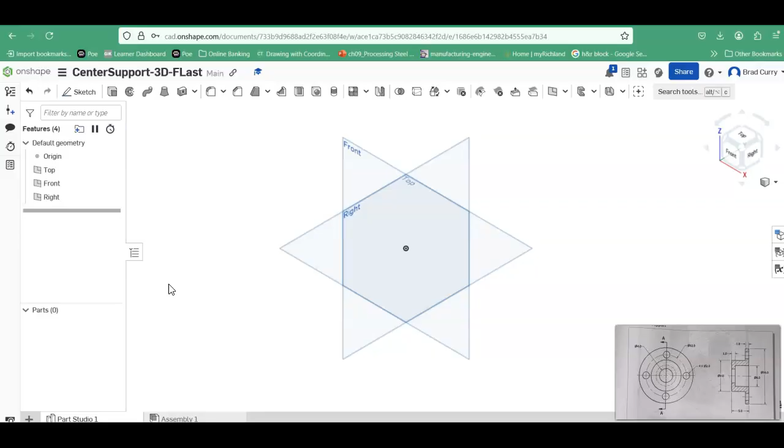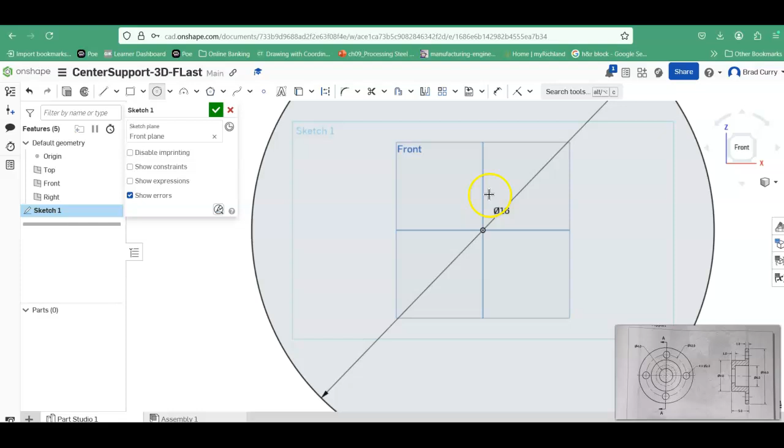The first way, if we sketch on the front view, we can basically sit here and say, all right, we've got a center point circle going off of our origin point here. We know that this is a 16-inch diameter going out here, let's select that. Then we also have the 9-inch diameter point as well. And we've got a center hole that goes through there that is a 4-inch diameter as well, so we'll place that at 4 inches.

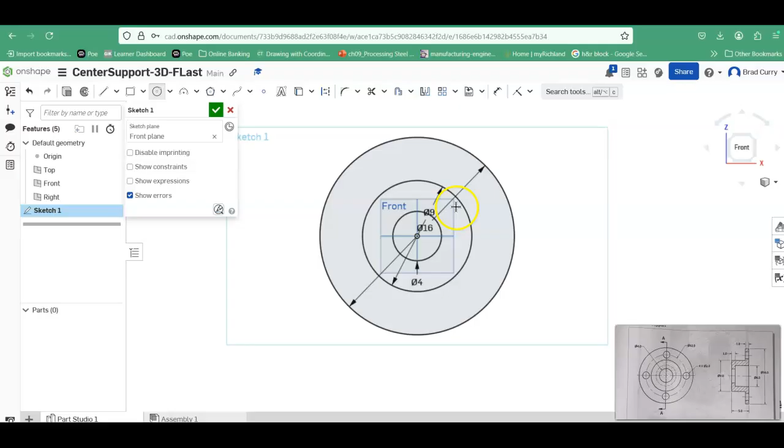Now we know that on the underside here, there's also another hole that's about 6 inches, but we're going to start this at the moment. We'll actually go ahead and draw that one in as well, right click, that one will be 6 inches there, and we've got the overall parts that we need.

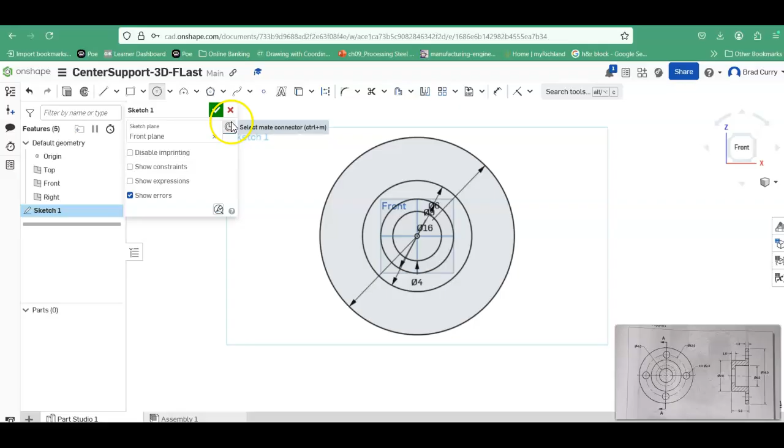All right, so let's go ahead and extrude this. Now I'm going to come back into my isometric here. You're going to have to think about which of these dimensions we know is going to be extruded. I'm going to extrude this going back into the part, and we also know that the inside portion here will also be extruded out.

All right, so let's go ahead, that is a dimension of 1, that's good, so we'll click there. Now, again, the sketch was consumed, so I'm going to poke this in the eyeball to get the sketch back. I'm having some issues seeing the differences between my planes, so we'll just shut those off right now so I don't get those confused.

As you know, now we're going to basically bring this surface, or predominantly this surface, out as well. If we do this one, it will close off, so we're going to hold off on that one for right now. So let's extrude this.

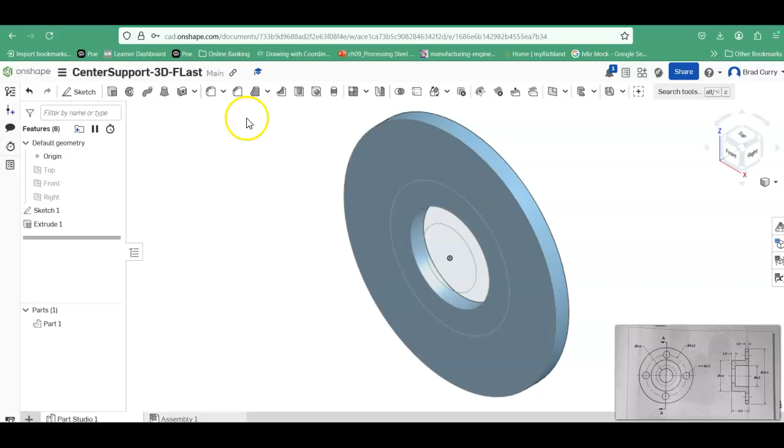And we want this to be extruded, and you kind of have to do a little bit of math. All right, we see that that's going to be extruded by 4 inches, so let's go ahead and change that to 4, coming out this way. And that looks pretty good.

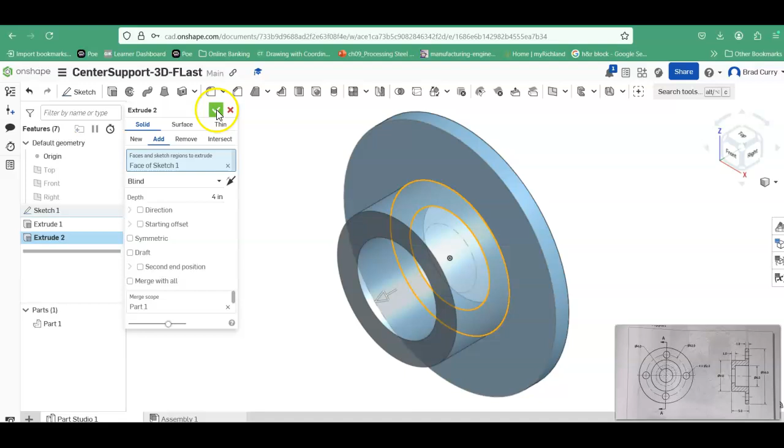So now we'll go back, and we have one more. We will need to create a sketch on this plane, and in this case the sketch we're basically going to be using is from here to there to kind of join these two together. So just go and create another circle from here, and that was the 4-inch dimension, so that places that into this.

Notice this is a construction line. We don't want that to be a construction line, so let's highlight that and uncheck construction.

So now at this point, we should be able to extrude that. So click back, hit extrude. In this case, let's go back to the isometric. The surface we're going to be adding will be here. Now notice it doesn't like this, because it wants to have another circle here on that sketch, and it's only seeing the one sketch.

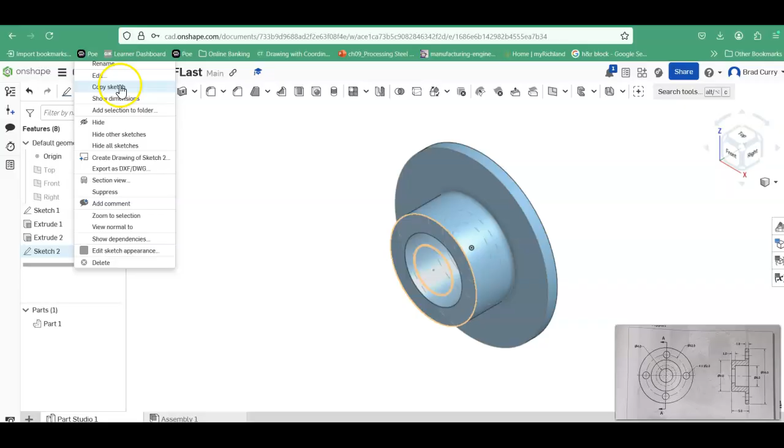So let's go back, edit this sketch. And of course we have to create another circle as well. Now in this case that's the 6-inch, so let's place this at 6 inches.

So now we should be able to extrude. We're going to extrude this back, and we see that that is 1 inch as well. So, and that is finished just by extruding these different diameters.

Let's go back here. We're going to have to create another sketch on this plane.

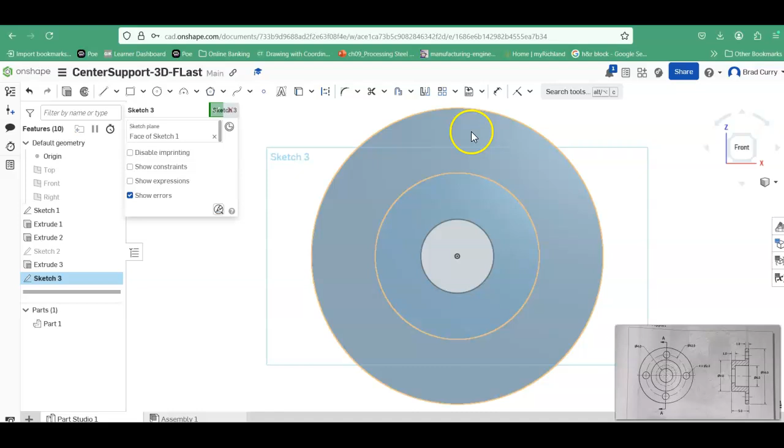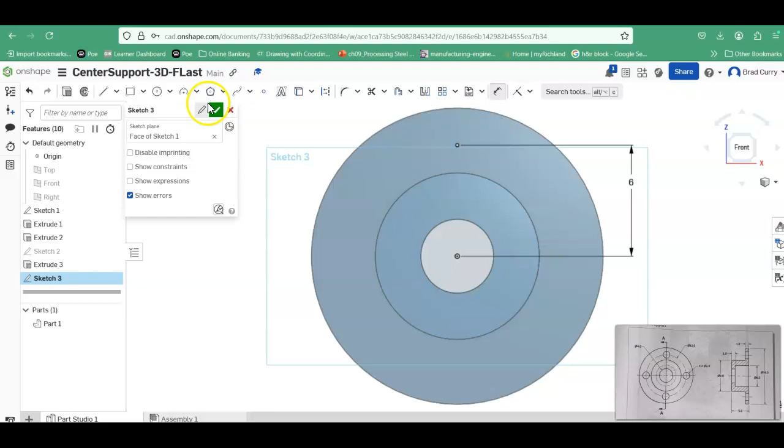So you could do it on the back plane as well, wouldn't necessarily matter. In this case, we're going to create a point right here at the top, and we're going to give that a dimensional constraint of 6, because it is on a 12-inch diameter bolt circle, so we're going to say that is at 6. I'm just going to have that as my sketch, because in this case I want to put a hole there.

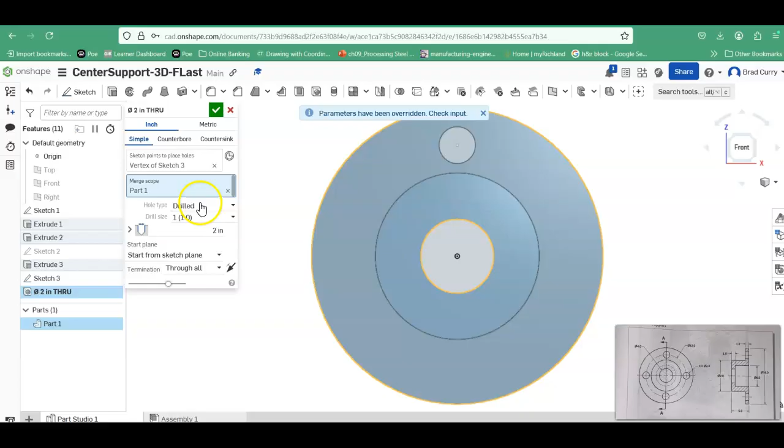So let's go ahead, we're going to put the hole right there. We'll take a look. This is just a standard simple hole, so it is a drilled hole that is 2 inches. So we'll go ahead and put a 2-inch drilled hole, and drill size will be a 2-inch drill size. Notice it does not like holes larger than what is given with the standard hole sizes, but we're going to keep that there. So it is going through all.

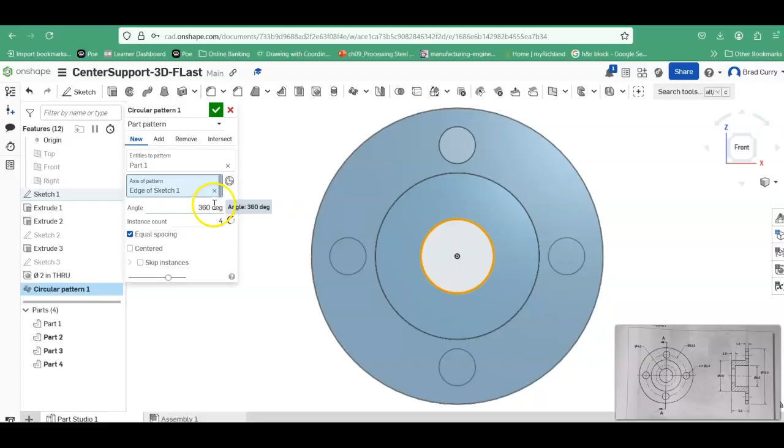So there's our actual hole, and now we can basically take and we're going to create a circular pattern. So we're going to put that hole, the axis of the pattern is right there, 360 degrees, 4 instances, equally spaced. And there is our hole pattern.

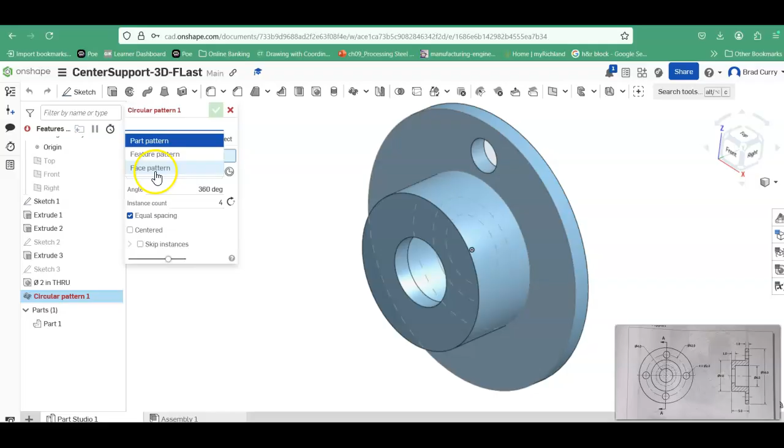Now, notice it did not give us and did not go through everything just like we wanted it to. So let's go back and take a second look. Let's go back to the circular pattern tool here and take a look. So what we are basically going to create a new pattern. Let's take a look at what we need: a part pattern, a feature pattern, or a face pattern. In this case, it's a feature pattern, and we want this hole to be the pattern, and next to the axis is right here.

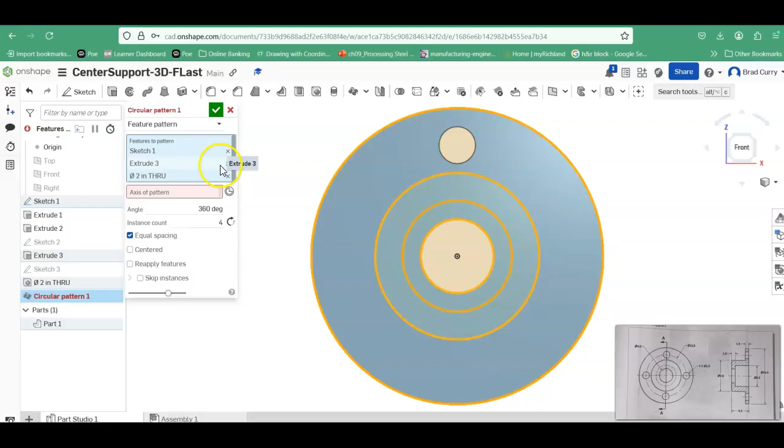So 360 degrees. The axis pattern is here. The feature to pattern is that hole. There you go. All done.

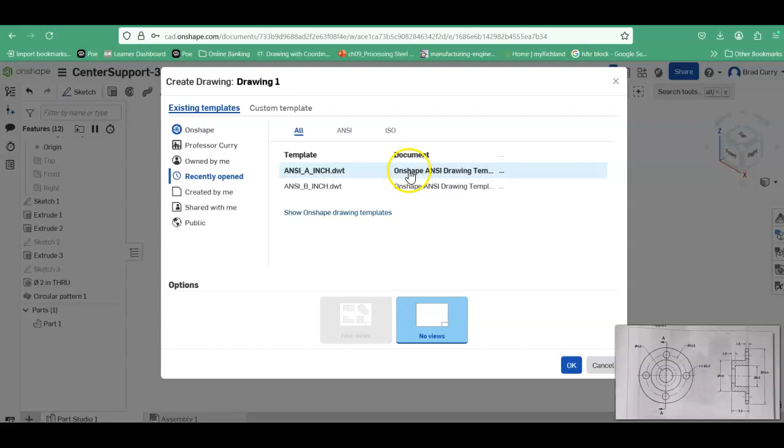All right, so now that we have that done, let's come right down here to our checkbox. We're going to add and create a drawing here with this. Notice this is going to be a size in Onshape. We have the choice of B or A. We're just going to select the A size ANSI. We'll go ahead and click OK with no views.

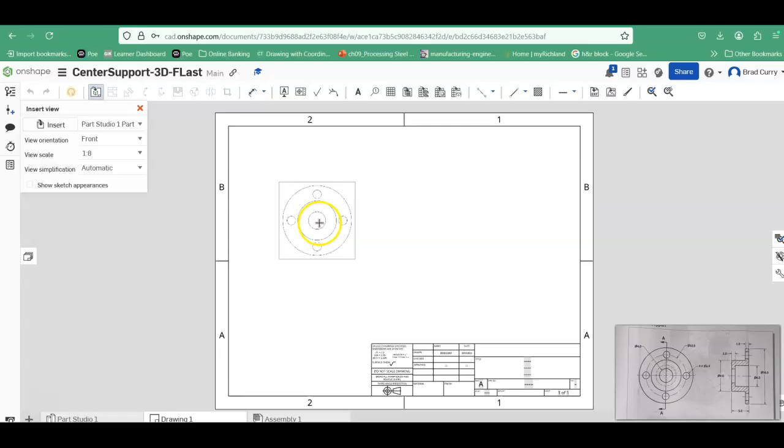We're going to put these views in. So this is our part. Our front view is going to be here. Notice how it's coming in with the view scale, so let's go ahead and change this view scale right now. Let's make this, see if we can get a 1:4. So here, we'll place this right here. That's the front view.

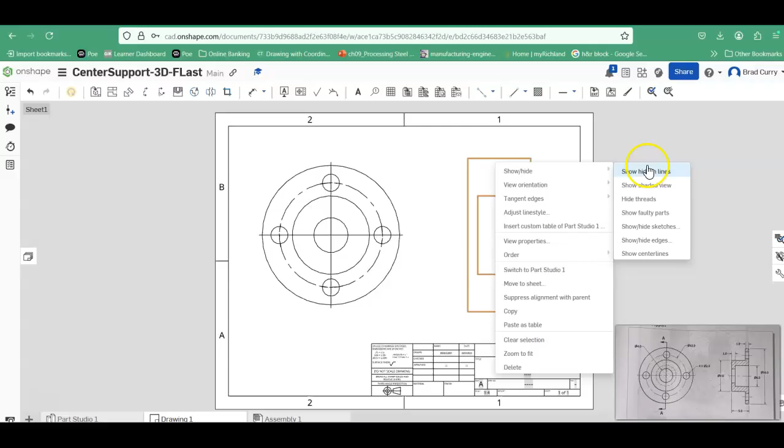We come right over here, and there is our side view. Now, we haven't dimensioned this, but notice how it's given us some features already. So let's highlight over here, right click. We're going to click on this, or sorry, I'm still in that tool, so I got to exit out of that tool. Right click, let's go ahead and say show hidden lines, so that way we see everything that it's supposed to be.

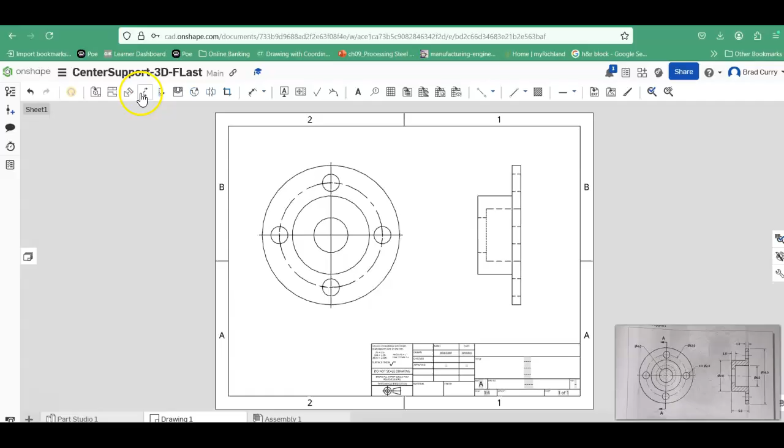But we are indeed, in reality, going to be creating a section view. So what we call a section view here. Now, notice there are different types of section views: aligned section view, broken out section view, detailed view, break view, crop view. Right now we're going to start with a section view, and the section view that we're going to take.

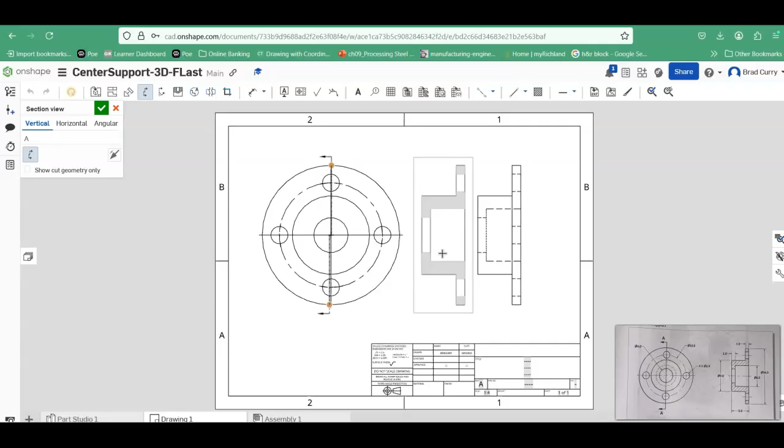So we're going to go from here down to here, and we're going to place it over here. Now I want you to see the difference. Place that view, and both of those views are now in line, and you can see what the difference would look like here between our section view - which is considered a full section view because it's cutting the piece in half as we do this - and our actual full orthographic drawing showing the hidden lines here as well. So that gives you an idea. So that gets that part taken care of.

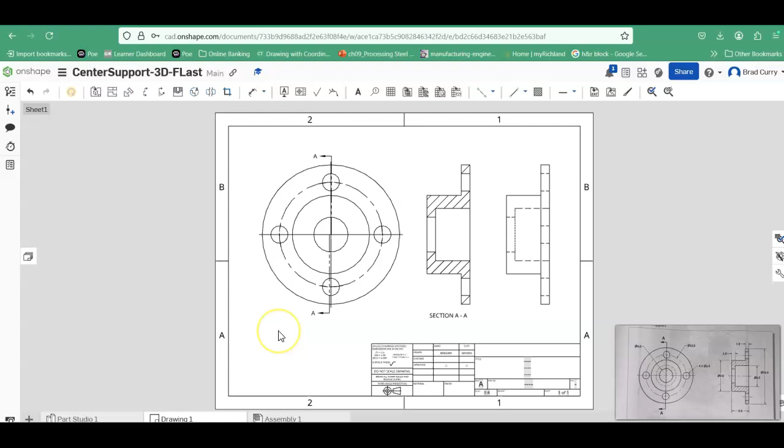We'll come back in, we'll fill in some more detail and stuff down here in the title block. We'll add some dimensions so that you can be aware of it. But this is how we would create these types of drawings here in Onshape.